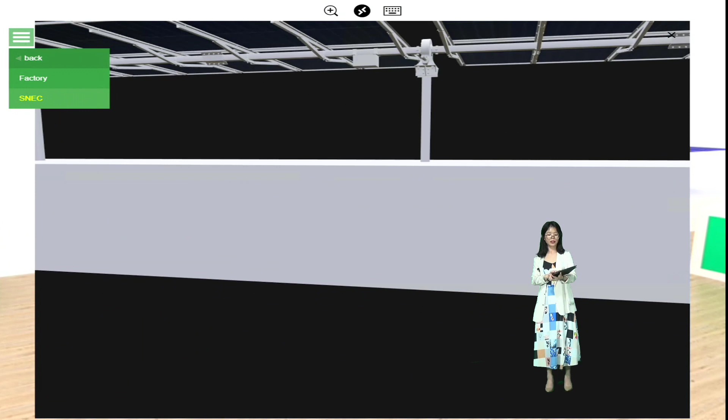Solar tracker, our flat single-axis solar tracking system. The slewing drive, the motor, is put on the post with screws. Very easy installation. And the control box, the control system, is put on the back side of the structure and also the back side of the solar modules, forming the shelter function for the control box, better cooling factor.

And our design can hold both the single row of solar modules and the double row of solar modules. Usually the module is put portrait way. Portrait way means like this. A little bit smaller so that you can see more details. So one table, the maximum solar module quantity that can be held is 90 pieces.

Alright, so to know more about the market information for the solar trackers, floating system, bifacial mounting system, as well as the new situations of our company, Mibet Energy, I would like to have a short presentation with a PowerPoint so that you guys can know more details of our products.

Our company's full name is Xiamen Mibet New Energy. We are headquartered in Xiamen City, southeast China, neighboring the Taiwan Strait. And we focus on the design and manufacture of solar PV mounting systems. Besides the headquarters in Xiamen, we have also founded subsidiaries in Japan and Australia.

Today I will introduce the 3 new products, our company history background, and our project references, totally 5 parts. The first part will be the solar tracking system. From the market research of IHS, the installation capacity for solar trackers in the year 2019 exceeded 31 gigawatts, up to a 55% increase.

And as we can see from 2017 to 2020, the installation capacity keeps going up very quickly for solar trackers, and the main market is in countries like the USA, South American countries, Brazil, Mexico, Chile, Spain, and Australia. As for Mibet Energy, we have mainly supplied our solar trackers to the China domestic market, Southeast Asian countries like Vietnam, Thailand, Malaysia, some European countries like Spain, and also African and Middle East countries like the UAE.

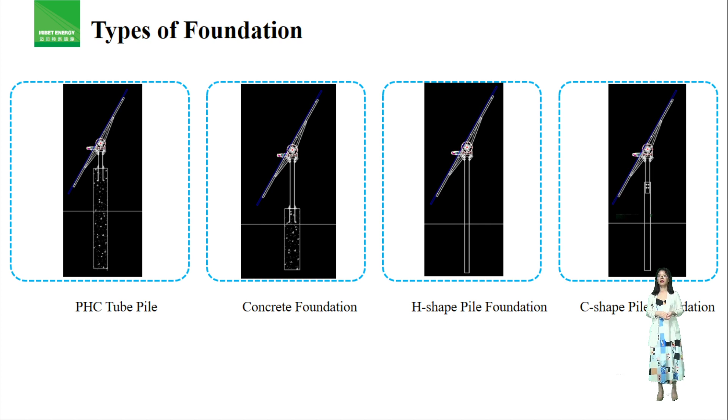So for types of foundations for our solar trackers, we mainly have 4 kinds: the PHC tube pile, the concrete foundation, the H-shaped pile foundation, and the C-shaped pile foundation. This is the model of our horizontal single-axis tracking system, and we mainly have 2 kinds of solar panel layout available, 1+N and 2+N, which means 1 row of solar modules portrait, 2 rows of solar modules portrait.

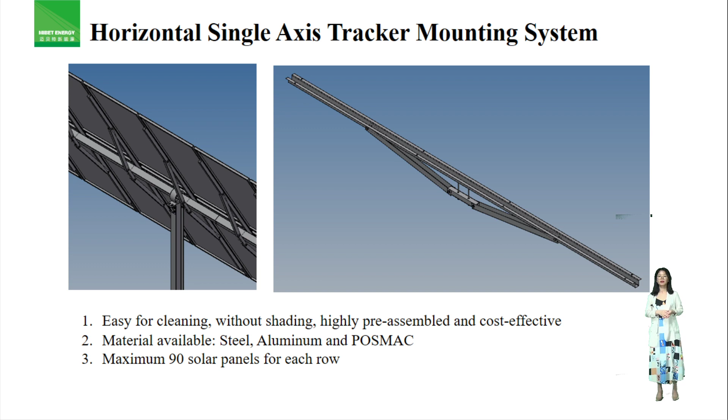The system is applicable for both framed and frameless solar modules, meaning double glass solar panels or traditional solar modules, as well as bifacial solar modules. So the main features of our tracking system: easy cleaning without shading, highly pre-assembled and cost-effective. The material available will be steel, aluminum, or POSMAC. And number 3, maximum 90 solar panels for each row, as I mentioned just now.

Solar panel layout for the horizontal tracker. The tracking angle could be within the range of plus and minus 60 degrees, the string for power supply could be 1500 volts or 1000 volts, and a lithium battery could be used for backup.

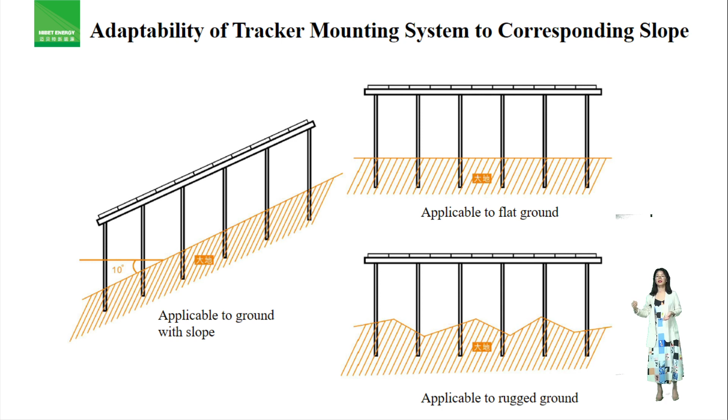So the adaptability of our tracker mounting system: it could be on different kinds of hillside, slope areas of the ground, flat areas of ground, rugged ground, some highly tilted and rugged ground, or slightly rugged ground.

According to some sample system research at our factory in Xiamen, the power generated by the solar trackers could be at least 16% higher than the fixed structure, and we have some software simulation for the comparison. So the rolling bearing is a kind of anti-loosen design. As we know, the trackers keep moving every day in sunny days, so the anti-loosen function is very important.

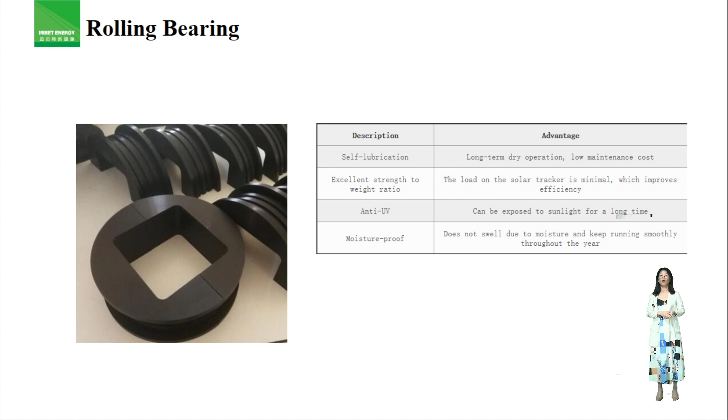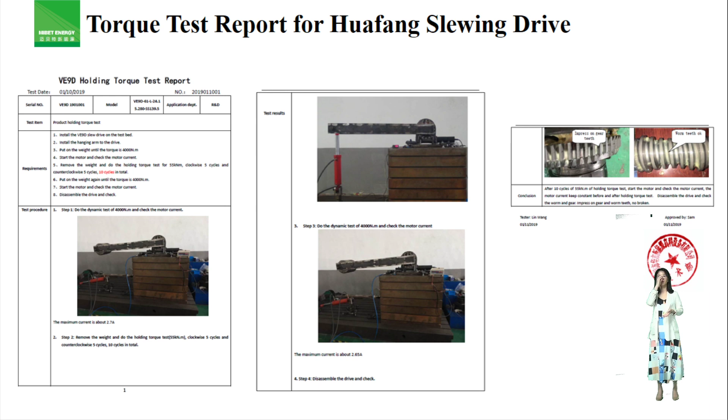So for the drive system, we have different sizes available. We have 3-inch, 5-inch, 7-inch, 12-inch, both vertical and horizontal slewing drives, as well as DC motors. We have different test reports and third-party certificates for our slewing drive; one of the main China domestic brands we use is Huafang. We have the torque test report from a third party.

We have the life cycle test report for the slewing drive. As we know, the drive keeps moving, so life cycle is very important. Usually our motor can last 5 to 8 years in real installation. We also have a waterproof performance test report from a third party, the TÜV report for the slewing drive.

And for the mechanical parameters, the features of our solar trackers: the system type could be a single row, single axis tracking system, and solar panels could be framed, frameless, single side, bifacial. Tracking range plus or minus 60 degrees configurable, and tracking accuracy plus or minus 1 degree. Solar panel quantity for one single row could be 2P30, 2P45, 1P78, 1P90, 1P60, different configurations, and that means 2 rows of solar modules portrait or 1 row of solar modules.

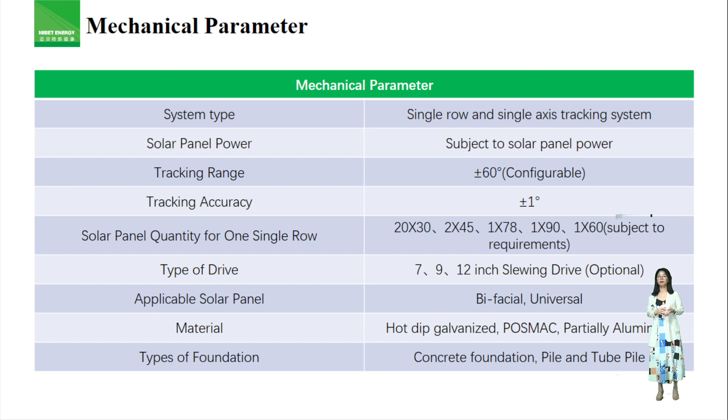Type of drives, we mainly have 3 types: 7, 9, 12-inch slewing drives. And we also have bifacial solar modules compatible with our solar trackers. The material available is mainly 3 kinds: hot dip galvanized steel, POSMAC steel, or aluminum. And types of foundation could be concrete foundation, pile, or tube piles.

So for system design principles, the system uses GPS and Beidou dual positioning system to automatically obtain the local latitude and longitude and the true solar time. By combining with astronomical calculation and the NASA official website solar tracking data verification, it can achieve high precision solar trajectory tracking.

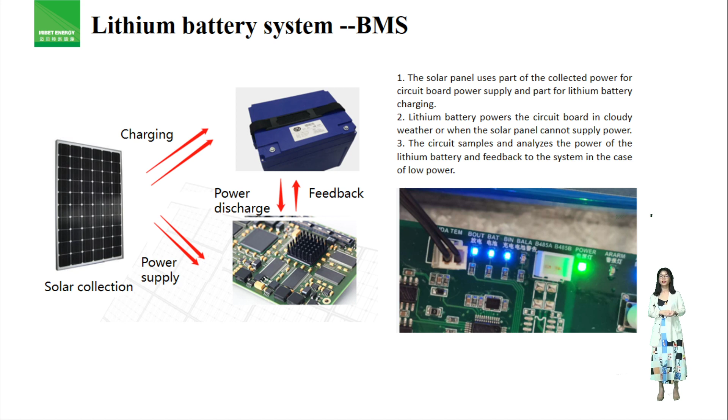So next part. Lithium battery system, the BMS, the power to supply the control system is very important. We have 2 kinds, usually DC power from the solar panels or from the battery. So optional. Next part, the multi-channel power supply system. Power supply for solar or battery power supply chipset. We have 3 options. First option is 24 volt motor power supply. Option 2, 5 volt chip power supply. Number 3 is 3.3 volt chip power supply.

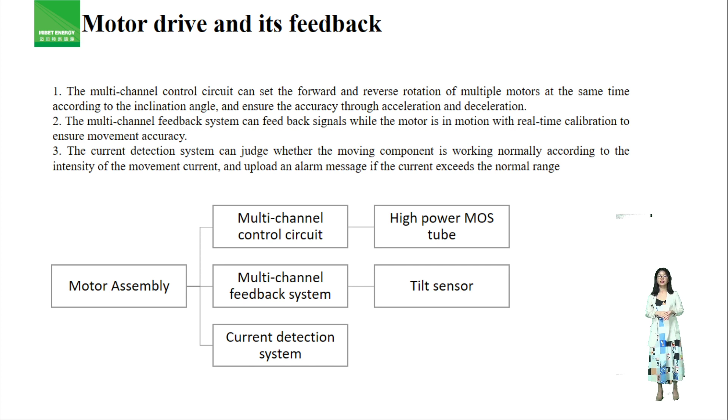Motor drive and its feedback: motor assembly, multi-channel control circuit, high power MOS tube, multi-channel feedback system, tilt sensor, current detection system. So wireless ad hoc network, that means we can supply a wireless communication way for the control system. We also can supply communication with wires. For wireless, we have Zigbee and LoRa as options.

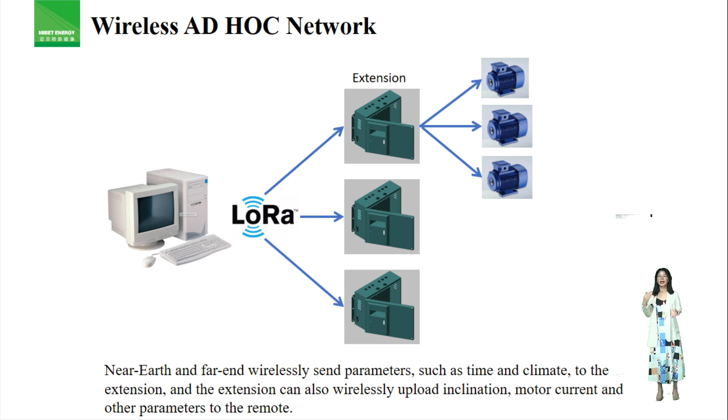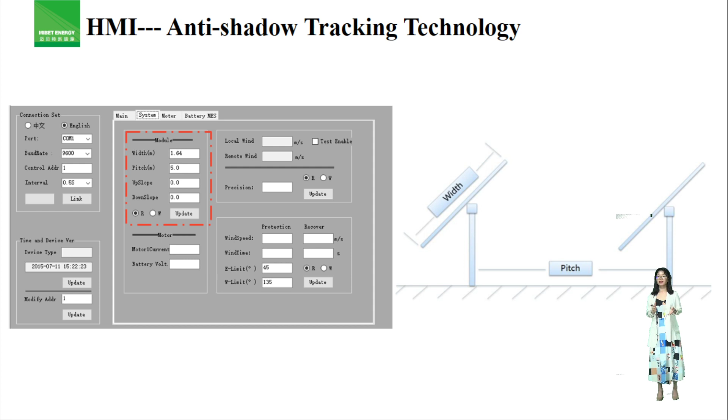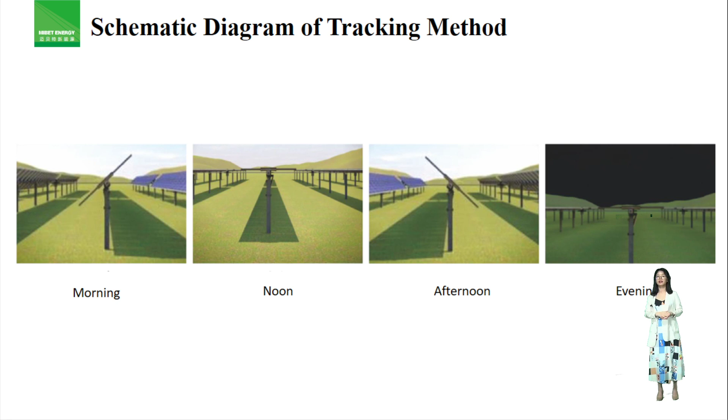So the specification of our control system is around 300 mm length, 210 mm wide, and thickness is around 130 mm. It's a very light and small box which can be fixed on the backside of the structure, on the backside of the solar modules. Control system self-powered. So the schematic diagram of the tracking method: we show four points from the morning, noon, 12 o'clock, afternoon, then to the evening. Evening usually will be 0 degrees.

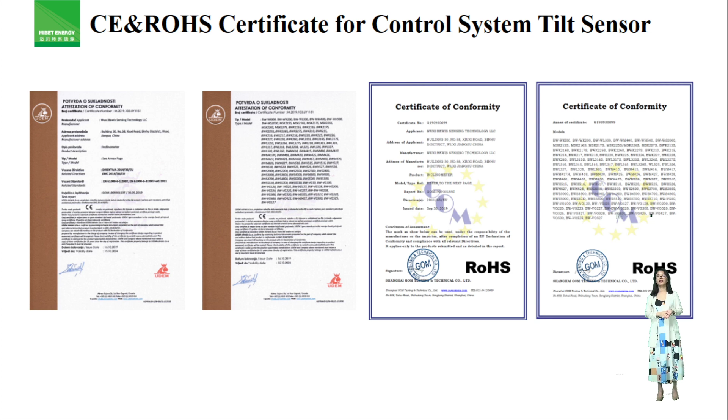Better wind resistance. And for the control system installation guideline, just put the box on the back side of the structure, and then only 2 wires outside to connect to the slewing drive. So for the control system, we have different third-party certificates like CE and RoHS. And we also have the CE certificate for the control system.

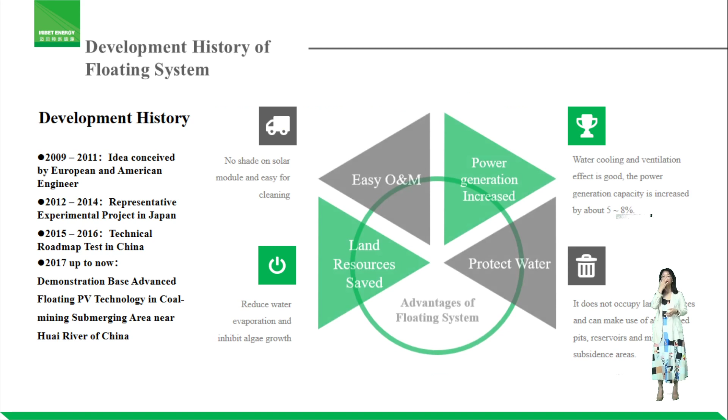As for the development history, as we know, floating solar is a new branch in the solar industry, without as long a history as ground solar projects or rooftop projects. From 2009 to 2011, it was only an idea conceived by European and American engineers. From 2012 to 2014, there were some representative experimental projects in Japan, and from 2015 to 2016, technical

roadmap tests in China. From 2017 up to now, we have some demonstration base advanced floating PV technology in coal mining submerged areas near the Huai River in China, like the biggest floating solar PV project, installed by Three Gorges in 2018. It's in the Huainan area, also close to the Huai River.

As for Mibet Energy, we started research and development for floating systems quite early, from 2015. We are one of the earliest companies to start designing floating systems, and now we rank among the top 3 floating solar system manufacturers globally. The development history, or the technical roadmap, of our floating system.

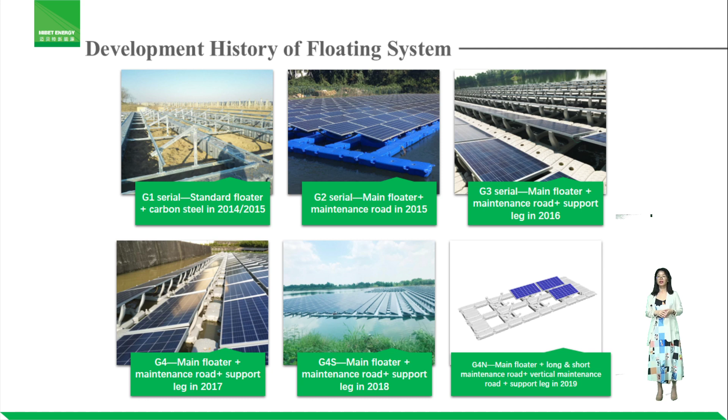After that, we designed G4 and G4S in 2017 and 2018, which combine better container loading with bigger and bigger solar module sizes. Then at the end of 2019, we launched our new generation floating system, named G4N, combining the full solution of the anchoring system, the full solution for string inverters, DC cables, AC cables, and also the fencing around the floating system, and the floater structure for the concentrated big transformer and inverters.

As for the standards followed by our floating system, we have different ISO standards, different GB standards used in China, IEC standards, and also the wind standard GB and wave load JTS. Then we also have BS6349 for the mooring devices calculation. We can also calculate under the Eurocode standard.

Now some comparison to competitors' floater products. As we know, the fixing points between the two clamps are very important to assure the guarantee and prevent micro breakage of the solar cells in the modules. In most competitors' current designs, the clamping distance between two clamps is less than 1 meter, which to some extent is not so safe, because our modules are on top of the water, always floating up and down. Also, the warranty required by most tier 1 solar module manufacturers requires at least 60% of the length of the solar module to be fixed.

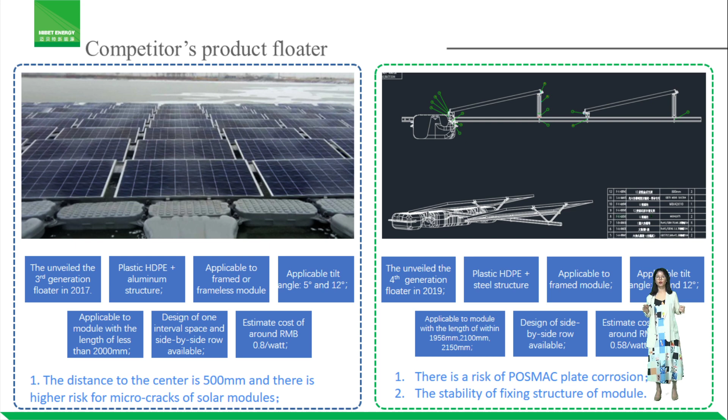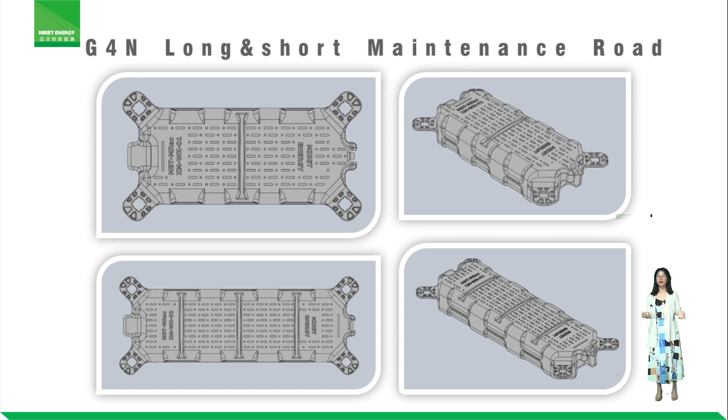So our G4N main floater has added some new strengthening structure inside to make the whole piece stronger compared with our G4S and G4. For our walkway floaters, we divided them into shorter and longer walkway floaters to achieve better configuration of solar modules and compatibility with the bigger and bigger modules available in the market. Currently, we can adopt lengths up to 2.3 meters. During SNEC, we witnessed many tier 1 brands launch 600 watt or higher output modules. The length is usually bigger than 2.25 meters now.

As for the support legs, our G4N design is changed to an arm shape like that to form a better clamping area and clamping distance between the two clamps, compatible with the warranty of the solar modules. As we know, our system should operate at least 20 to 25 years outdoors, so the warranty for solar modules is very important.

This is another portrait, or vertical, maintenance walkway floater we specially designed for the string inverter. An inverter of around 85 to 100 kilograms can be put on this kind of floater. The material is HDPE, the thickness is not less than 3 millimeters, and the buoyancy is more than 150 kilograms per square meter. The anti-slip design on the surface is also quite good. Fixing points for the string inverter, the cable and the fence are added.

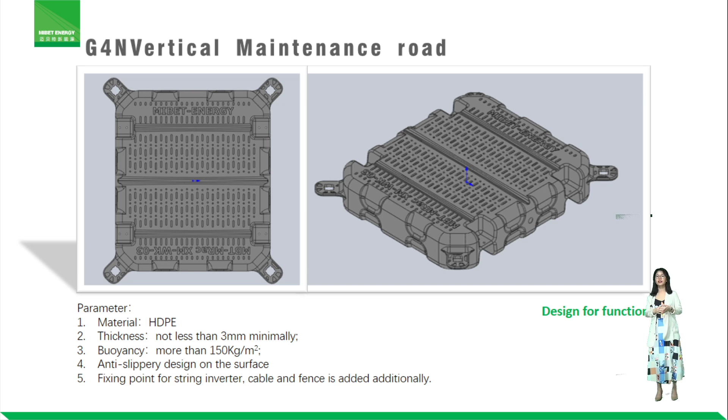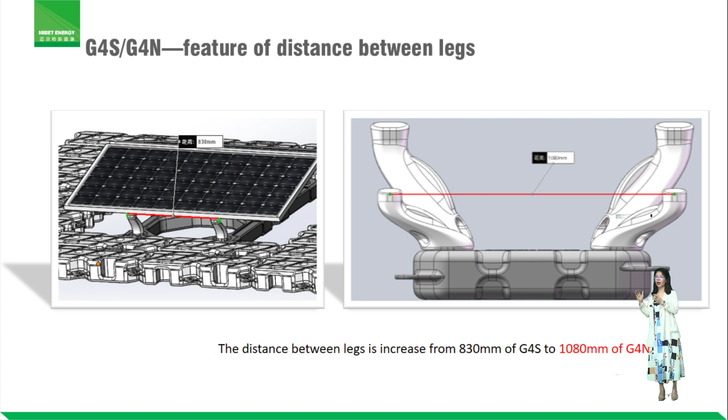The distance between the legs, as I mentioned just now, our G4N design is a kind of arm design, is increased from G4S 830 millimeter to 1080 millimeter, then to 1200 millimeter now. So the clamping point for our floaters is on the top of the side floater, which is not in the middle, also to make the waterproof function better. This is also a special and patented design from Mibet Energy.

And our walkway floaters, except the four connecting ears, we also have the overlapping area between the two floaters to make the whole walkway, whole floater platform connection and strength better.

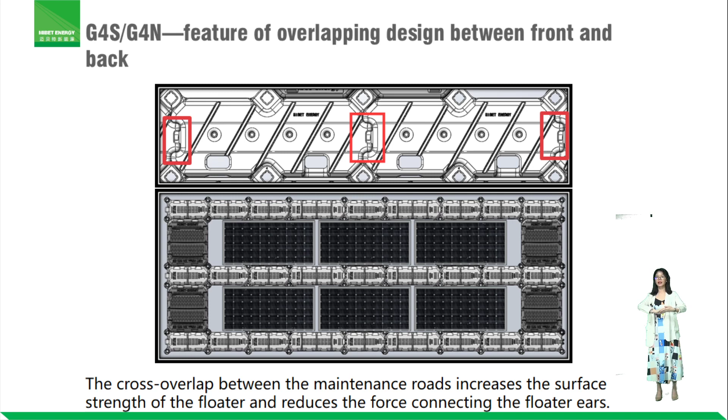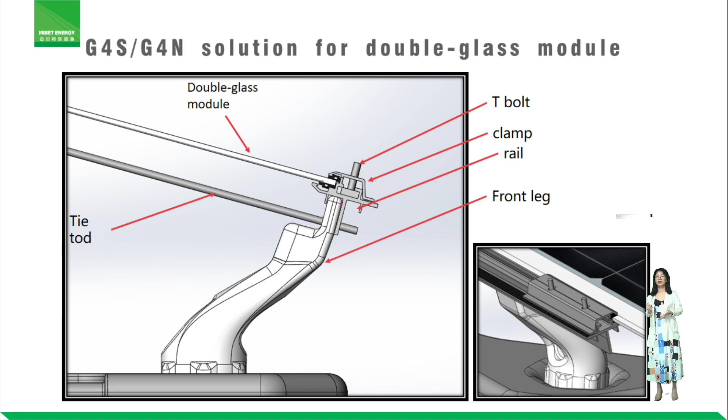So when we install some floating projects on the reservoir, especially for some natural lakes or some treatment water lakes located in rural areas, if we hire some workers to watch the project all 24 hours, the cost will be very high. So we need to have some fencing function to protect the system from some animals, from some not intended step on. So we added the fencing functions for our G4N.

And this is the full layout for our G4N, which means we have walkway floaters for each row of the solar modules. The buoyancy is very good, can withstand 60 meters per second of wind load for this kind of design, and the maintenance for this kind of design is also quite good.

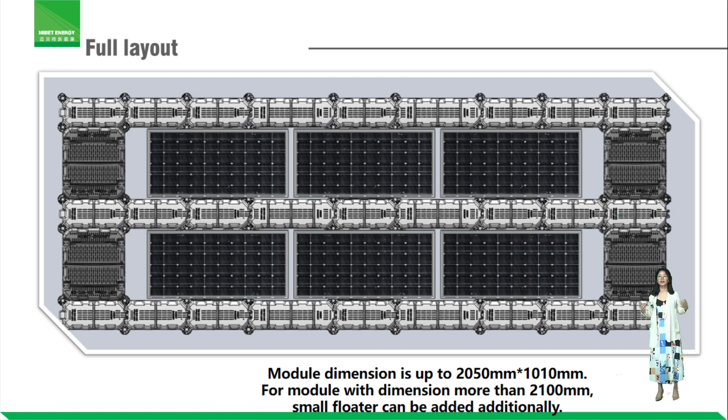So when the wind load is not so strong, and we also need to consider the investment cost, we have another interval layout design. That means we only have walkway floaters for every 2 rows of solar modules. Then when we want to save more cost of our investment, we also have 2 interval space layout.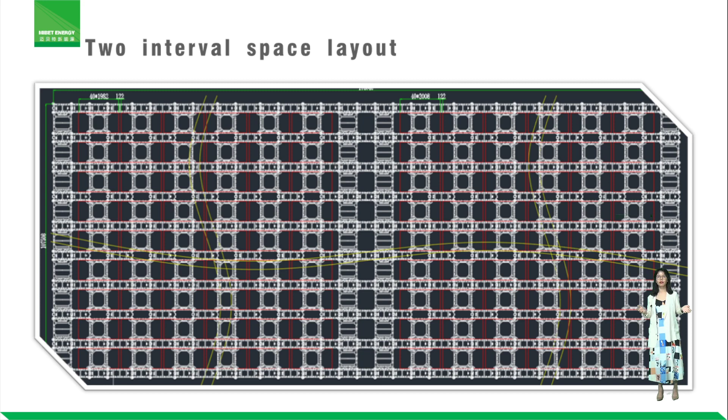We also have the symmetrical design for the tropical areas when the latitude is not so high, with 5 degrees of tilt angle, 5 degree symmetrical design like this. And for our single side layout, usually our design's tilt angle is 10 degree and 15 degree. 5 degree is also available.

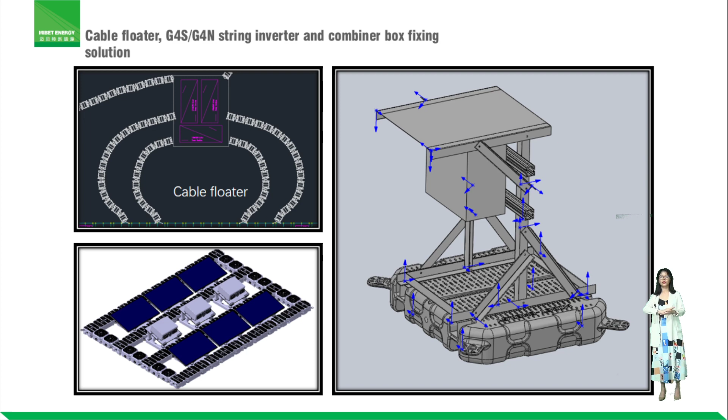So the summary of our solar floating G4M features. Except a small number of fasteners and fixing fixtures, the overall structure of the floating system is all plastic HDPE. In addition to the conventional 5 degrees and 10 degrees, the maximum inclination angle can be 15 degrees.

The center of the side length of the floating system clamping component is more than 1 meter to ensure its stability. And the aisle floating body adopts overlapping design, and adopts the fixing method of the inner frame of the clamping component. After installation, the clearance between the lowest point of the solar module and the water surface is more than 300 millimeters.

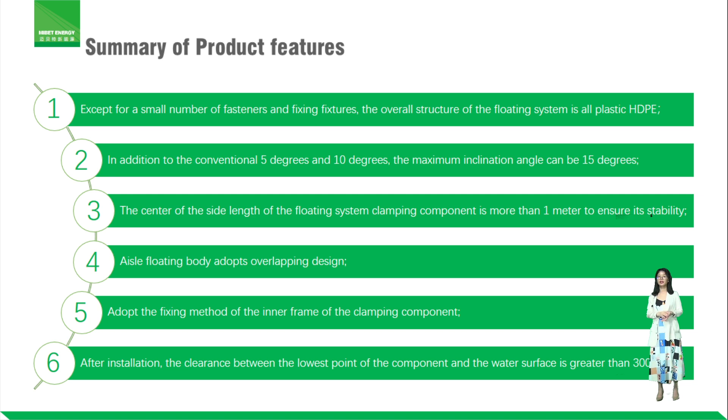So for the quality inspection of our floating system, usually we will check the critical installation dimensions of each floater, and during the production we check to confirm the actual weight, the wall thickness, the inner base thickness of the floater, then randomly check the strength of the parts, at least 5 to 10%. It depends on the floater's quantity. Then before the shipping and packing, we will have a full inspection again.

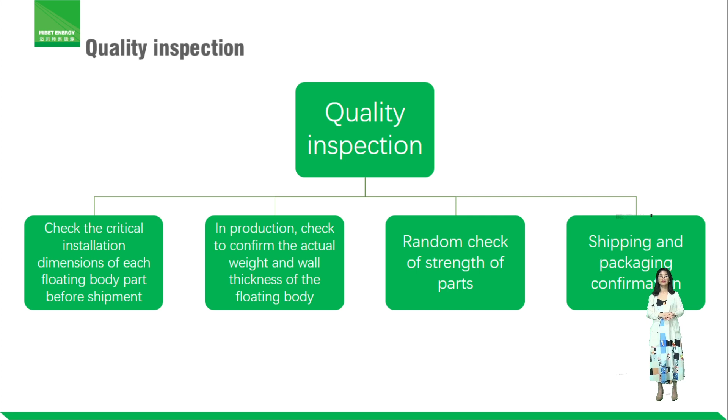As we know, the construction part is not as clear as the ground project or rooftop project, especially for the anchoring system. It's totally different from the ground project and rooftop project. Usually we have two kinds of ways or methods to design and construct the anchoring system.

One is designing the anchoring points into the bottom of the water with different ways: one is with concrete pile directly in, or with a concrete block to put on top of the bottom of the reservoir. The other is anchoring on the shore. It depends on the area of the water and the distance from the floating platform to the shore. So the anchoring concrete block structure, for example.

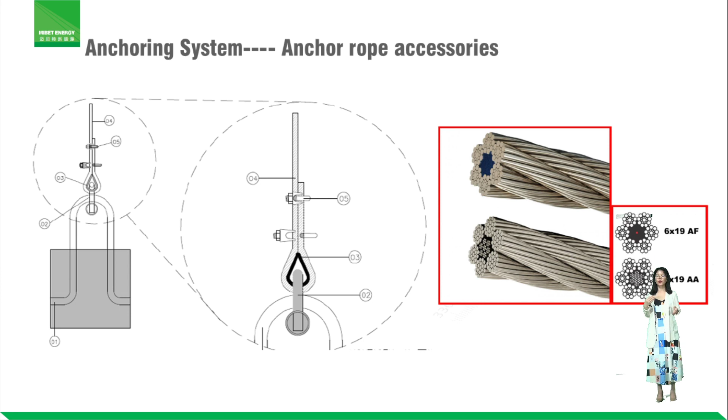The anchoring rope connecting ways - for ropes, we have mainly two kinds of material available: steel rope or a kind of high strengthened plastic. So for the anchoring components, the structure of how to fix with our floaters will be a welded structure with Q345 steel.

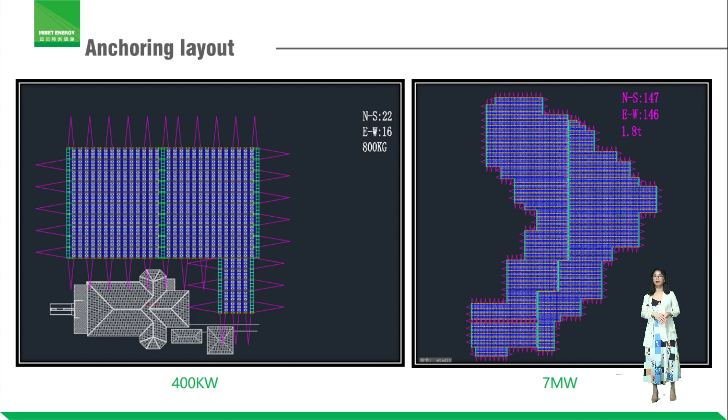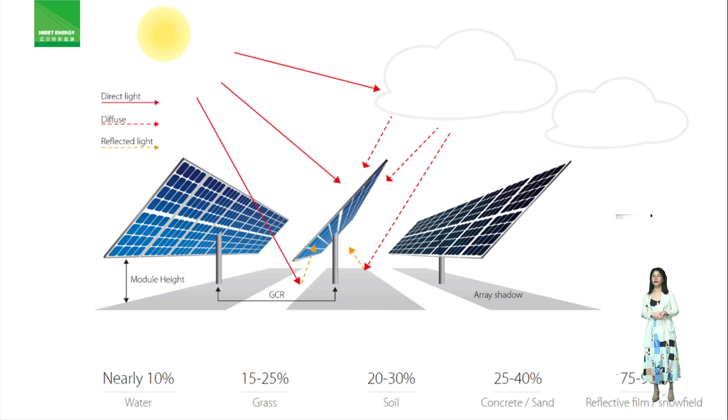This is research from a Tier 1 and top 3 solar modules brand. From different surfaces, the reflection proportion is different. On top of water, nearly 10%. On grass, 15 to 25%. On soil, 20 to 30%. On concrete or sand, 25 to 40%. On film or some snow fields it could reach 75 to 90%.

So module height should be more than 1 meter. For other factors, we will show you more details later. Remember to send emails to contact us, with online messages.

This is another research study for real projects collected in different countries, like USA, China, India, and Saudi Arabia. We can see from different kinds of surfaces the power output increased percentage is different. From normal land, usually ranged from 10% to 20%. From water it's around 5 to 8%.

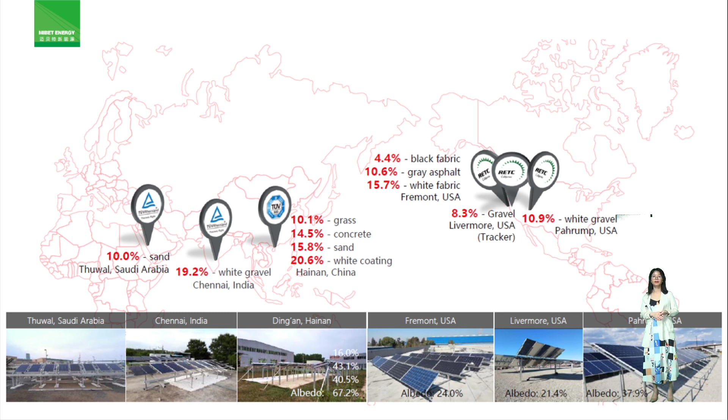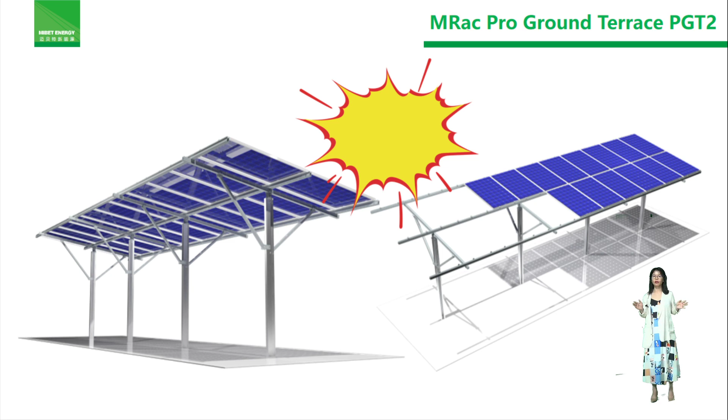So now I would like to introduce our bifacial ground mounting system, PGT2, which is a single pile ramming pile design with a pile rammed directly into the soil. Very easy to install, suitable for large-scale projects. As we know, because shading should be avoided for bifacial solar modules, our main beams - the horizontal beam and the portrait beam - arrangement should be very carefully designed to be exactly compliant according to the width and length of the solar module and the height of ground clearance.

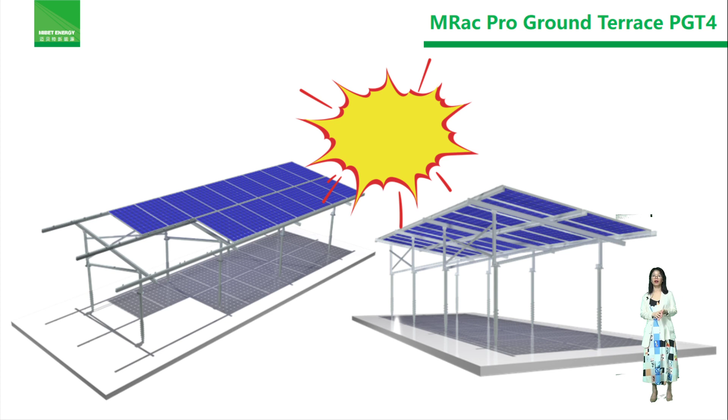So more photos of our PGT4.

So part 4, I will introduce the main background of our company, Mibet Energy. We have supplied more than 8 gigawatts globally till the end of 2019.

Our annual production capacity for the ground and rooftop mounting system is now more than 2 gigawatts, and for floating system this year is around 300 megawatts. For solar trackers, we also have around 1 gigawatt production capacity. We have more than 3,000 project references globally. We are ranking top 10 solar mounting brand, and top 3 for solar floating brand. We have more than 30 certificates from different institutions, more than 60 domestic and international patents for our structural design, and our cargoes have been exported to more than 100 countries and regions.

The main history of our company: Mibet Energy was founded in 2012. In the same year, we created our MRac brand and stepped into the Europe and American market. In 2013, we passed the ISO 9001-2008 certification and built up our first phase factory, and were awarded Top 10 PV Mounting Enterprise. Then in 2014, we passed more international certificates like TUV, CE, MCS, AS/NZS 1170.

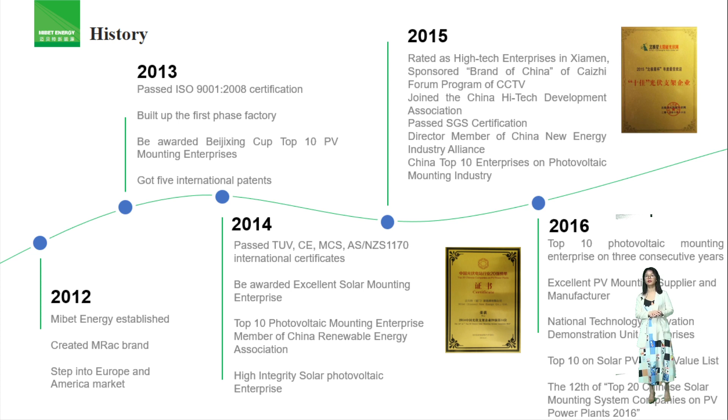So in the year 2017, we are awarded as a Xiamen Sample Enterprise in Production, Operation and Monitoring Chinese medium-sized enterprise. In the year 2018, we are rated as top 10 solar PV mounting system continuously. And in the year 2019, we are awarded as Xiamen Growing Small and Medium-Sized Enterprise. And the Australian branch company subsidiary is founded.

For our further plan in 2020 to 2021, we are targeted to be Australian's top 1 roof mounting brand. Currently, our market share in the Australian market is more than 40%, and the production capacity for floating PV systems will reach 800 megawatts, planning for larger solar ground mounting system projects for tracker systems, floater systems, bifacial mounting systems, and commercial carports.

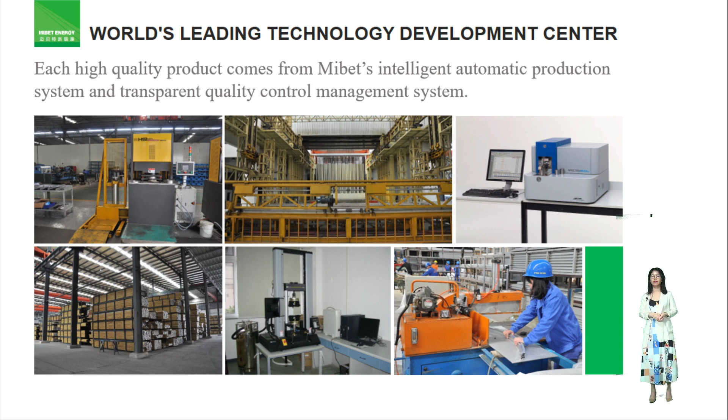So we have our markets in different countries. Top 3 markets: first is our APAC countries like Southeast Asia and Australia. Number 2 is Japan and South Korea. Number 3 is China domestic.

Except these top 3 markets, we also have markets in South American countries like Brazil, Chile, Argentina, Mexico, Uruguay. And we also have markets in North American countries like USA and Canada. We have quite good market share in European countries like Spain, UK, Poland. Then we also have markets in African countries like South Africa, Nigeria, Morocco, Egypt, Kenya. And we also have our markets in Middle East Asia like UAE, Israel, etc.

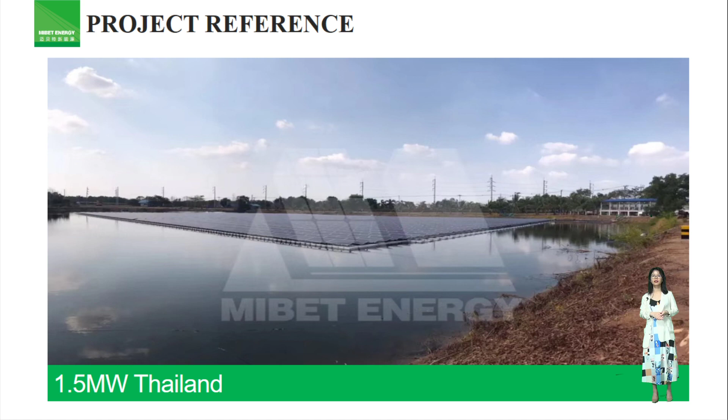So project reference. This is the project reference for the floating system: a 2.5 megawatt in Beijing, 1 megawatt in Shandong, and 1.5 megawatt in Thailand. Several megawatts in Thailand, 1.5 megawatt in Zhejiang province, 10 megawatt combined with 6 sites in Thailand, a 58 megawatt in Middle China, and a 20 megawatt double glass project in China.

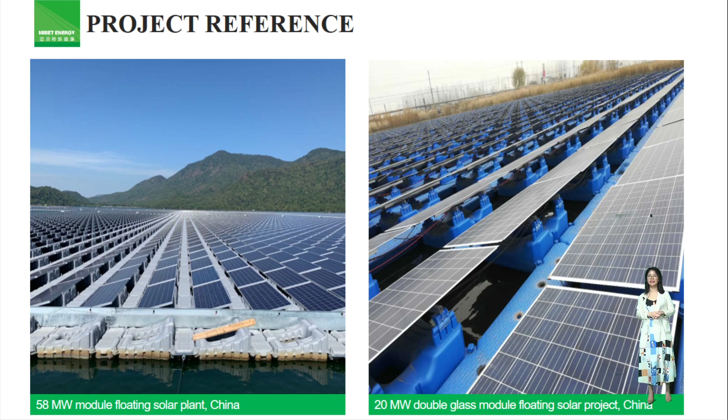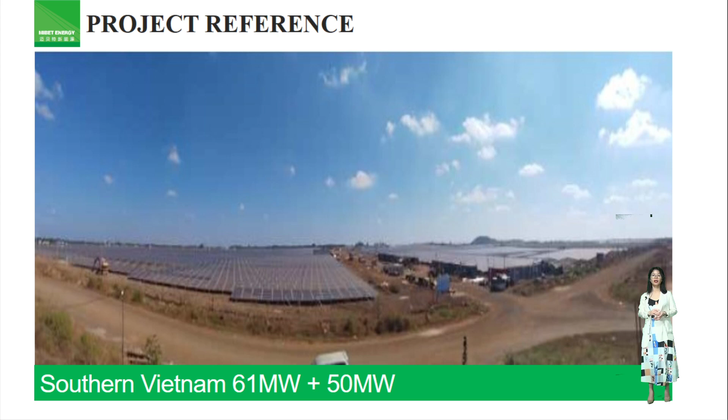So for ground mounting project reference: Cambodia 5 megawatt with steel structure, a 6 megawatt in South Australia, White Island, a 61 megawatt and a 50 megawatt installed in southern Vietnam with the solution of PGT4, and a 51 megawatt in Qinghai province, a 5 megawatt in Uruguay combined with different projects, a 20 megawatt in Hunan province, and a 50 megawatt in Qinghai with concrete foundation.

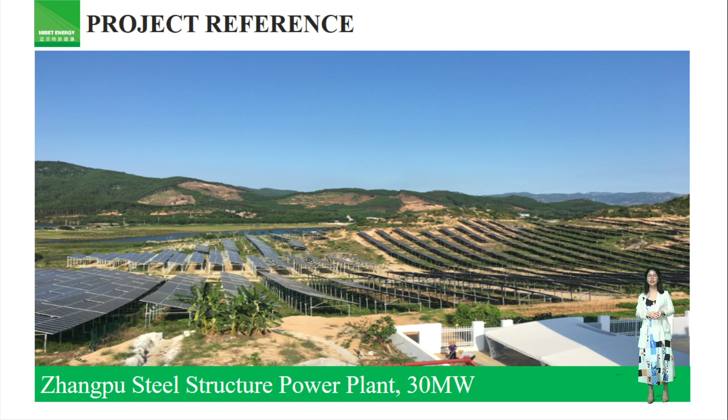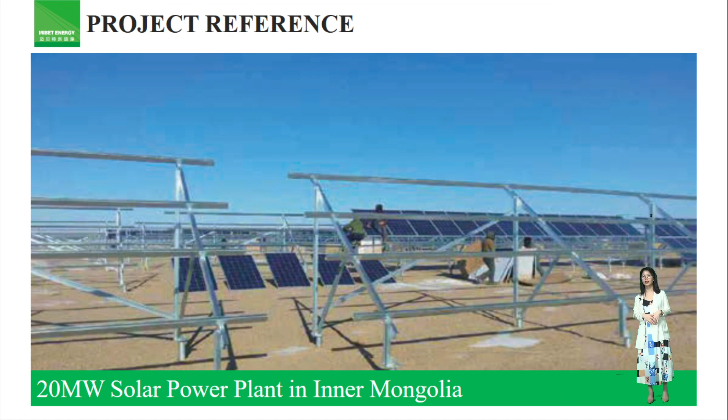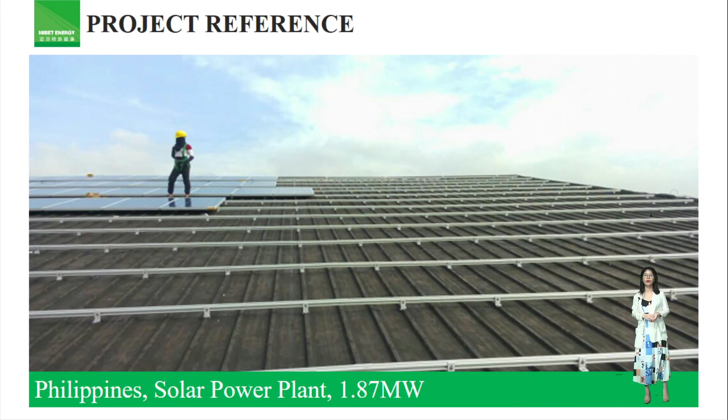Last project reference part is for our rooftop mounting system. It's a 12 megawatt in Hunan, Middle China, Thailand around 4 megawatt, Philippines around 2 megawatt, Vietnam on a shopping mall, on 2 shopping malls of the same brand, 500 kilowatt and 2 megawatt. Central Vietnam factory around 1 megawatt. So Philippines, we have more different projects, 1.6, 5.2 megawatt.

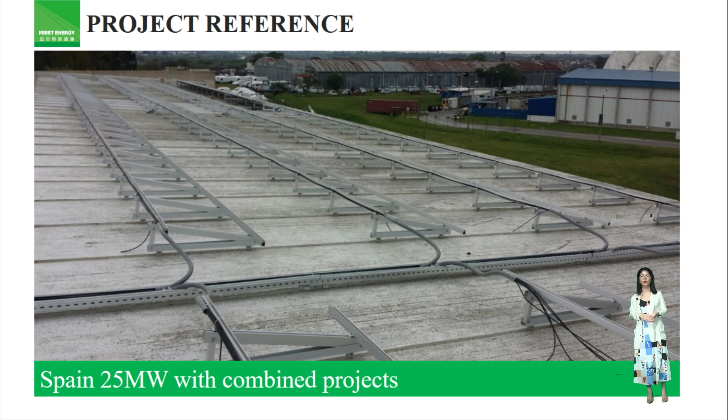Spain, we have combined projects in the year 2019 around 25 megawatt. In Shandong, we installed around 30 megawatt in a factory area. Singapore, we also supplied more than 35 megawatt in the past 3 years. In Dubai, 1.02 megawatt installed on a flat roof. Malaysia and Kuala Lumpur Airport, a 5.63 megawatt clip lock type metal roof mounting system is supplied in the year 2015.

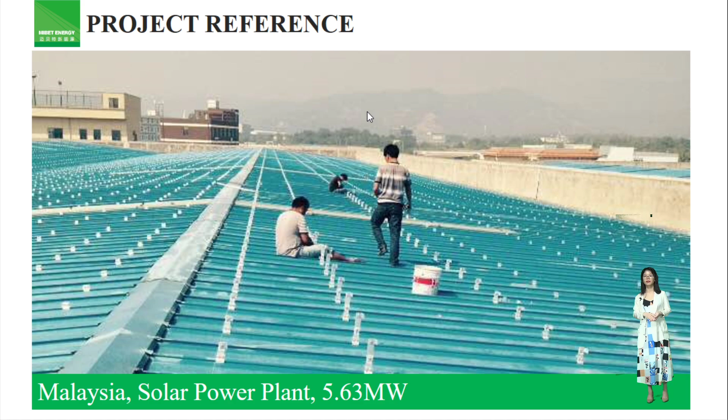Wow, thank you, Michelle. What a sharing. During your sharing, I collected some typical questions from our dear viewers, and I would like to have your answers for that. But before we start the Q&A, I would like to know what you have seen over the past few days, the past 2 days at SNEC.

Okay, this is a great question. As we know, because of the border restrictions this year, we cannot receive the overseas partners and friends at our booth in SNEC in Shanghai.

So most of the visitors these 2 days are our domestic friends and domestic partners, while still we have some international friends who are based in Chinese cities like Shanghai, Beijing, Guangzhou. They visit us, and they are the representatives of some overseas companies.

And except the solid booth in SNEC, we can see many companies launch live shows like Mibet Energy is doing now, and most of the top 10 solar module factories launched very high bifacial solar modules this year, and solar modules for BIPV application. As for solar inverter brands, the top 3 brands all have launched very high-end technology products this year in SNEC.

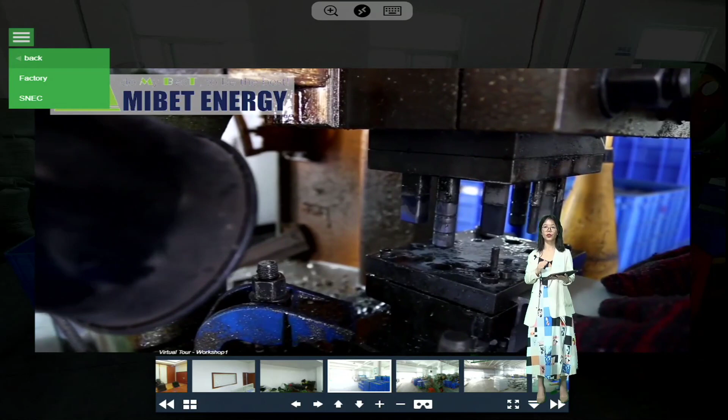So next part, I will bring you to our factory directly. This is our first machining factory. We totally have 3 machining factories. This machining factory, we mainly do the punching, cutting, and the screw lines. I also would like to play the video to show more closely. The cutting machine, the punching machine.

Okay, let's go to next part. Next part, we go to our workshop 2. We have different selections of different molds here to make different components. We have auto punching machines here.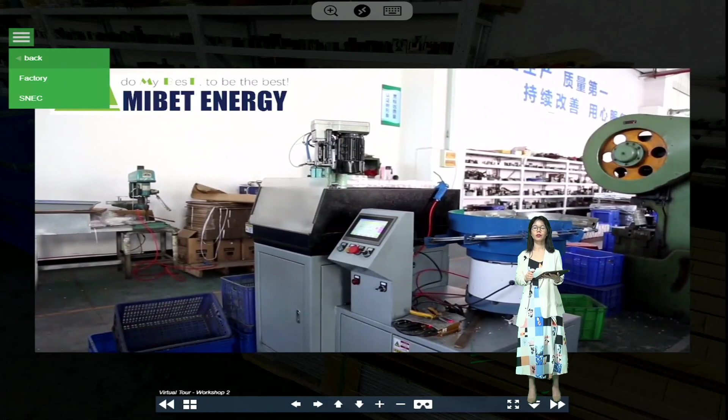I would like to play another video for this machining workshop 2, the cutting machine. We have some covers outside to assure safety. The cutting, different punching machines, and the automatic machine to produce our middle clamps and the tilt-in nuts.

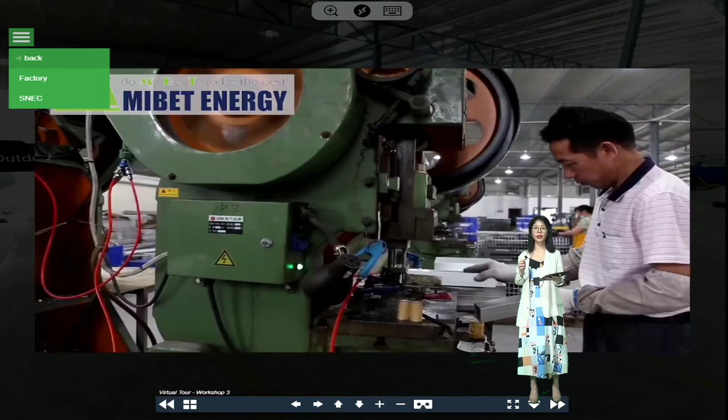So we go to next factory. We have the other machining factory, big one, to produce bigger components. I will play another video. We have more than 20 punching machines in this factory, 5 cutting machines in this factory.

Our orders this year are quite fully planned. Although we cannot see each other face to face this year, still our business is running quite well, and we appreciate a lot the support offered from all our international partners.

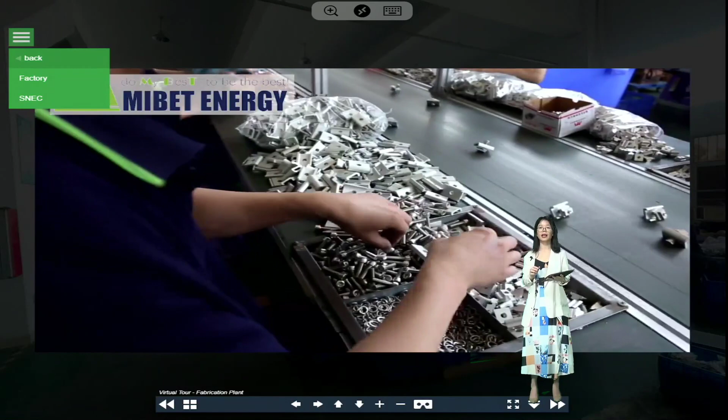So next part, we go to our assembly factory. So assembly factory, we have 4 semi-automatic assembly lines for the small components like end clamp, middle clamp, rail joiners.

So except the semi-automatic assembly lines for the small components, we also have the 2 manual lines to assemble some smaller components. Then we have the pre-assembly lines for big components like ground support beams and posts. So for ground mounting.

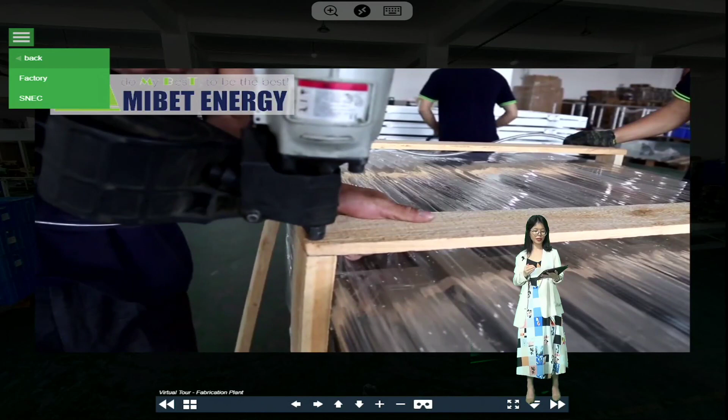Our packaging lines. Usually our small components will be packed in cartons, and big, longer components are put on the pallets. They can be easily loaded and unloaded by standard forklifts.

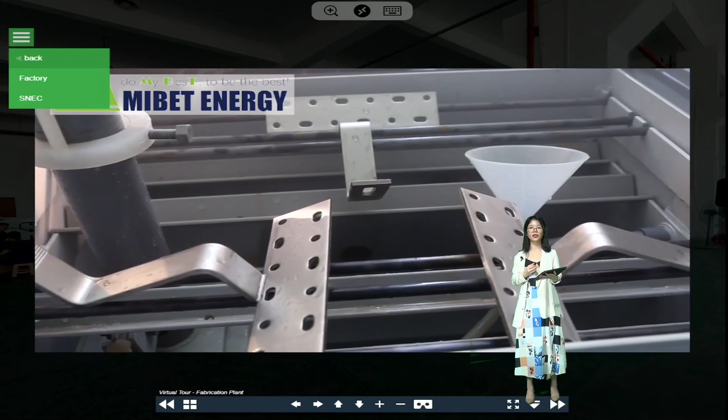As we know, quality assurance is very important for the application of the products and for the warranty. So I would like to show some main steps and procedures of our tests and inspections. The inspection to test the composition of the material, the spray test for the anti-corrosion of the surface treatment.

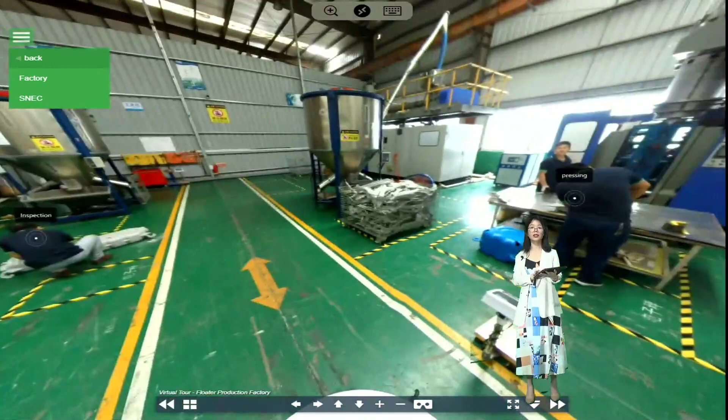So this is our factory for the floaters. I'll show you around. The biggest machine is to produce the main floater. We also have the inspection here to test the thickness of the floaters. So this is the machine to produce the walkway floaters.

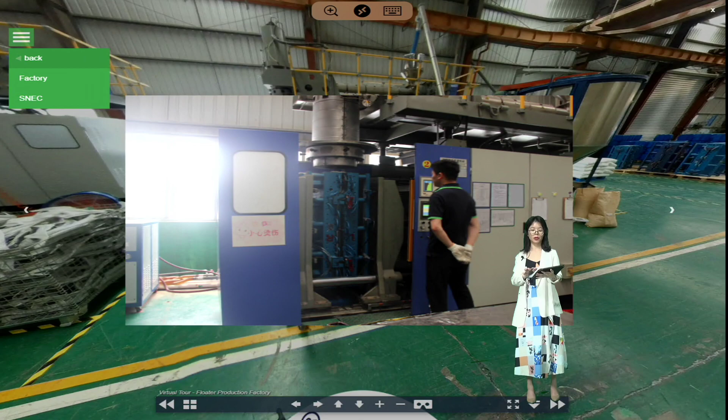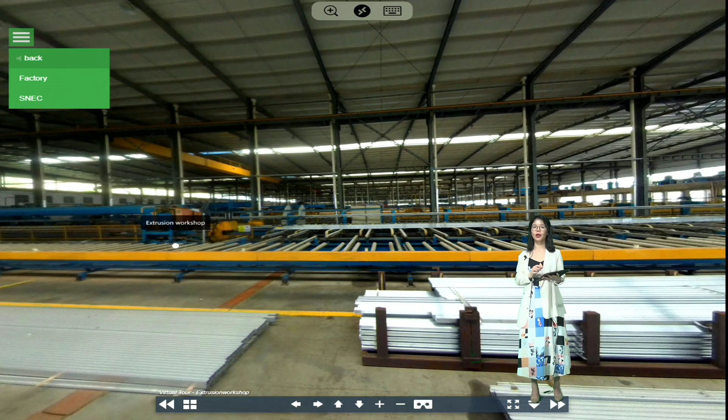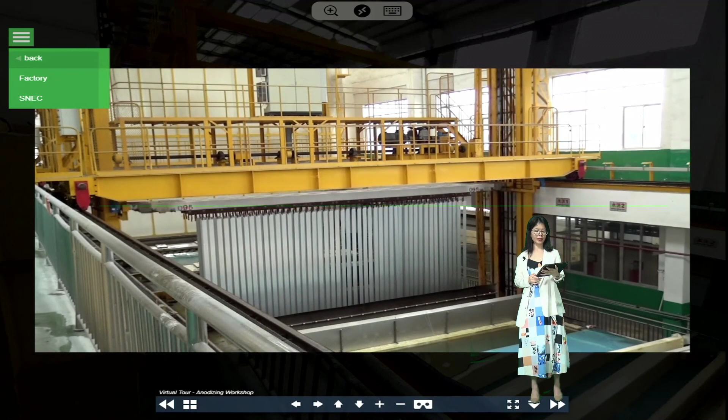We go to next part. It's our raw material aluminum extrusion workshop. The anodizing line. It is a totally automatic line for the treatment of the aluminum. Anodizing thickness usually ranges from 10 micron to 12 micron.

Okay. So for the packaging, usually the rails will be packed 6 pieces or 8 pieces per bundle for easier carrying on site. So the aging. The stock waiting for aging for the aluminum material.

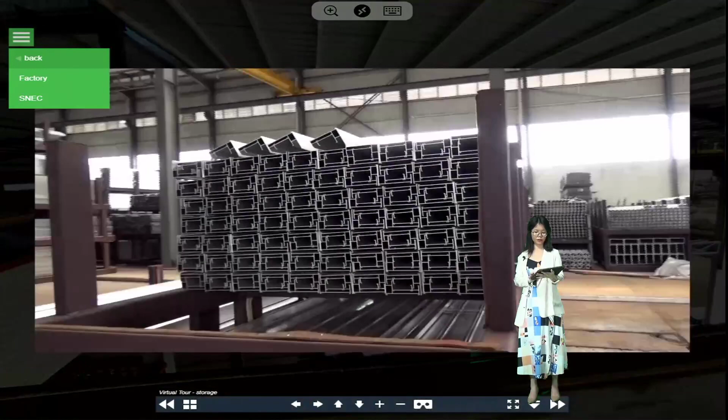Usually the rails and the aluminum will be put on the steel structure to put into some furnace, some equipment, to be aged for 4 to 8 hours to make the hardness of the material better.

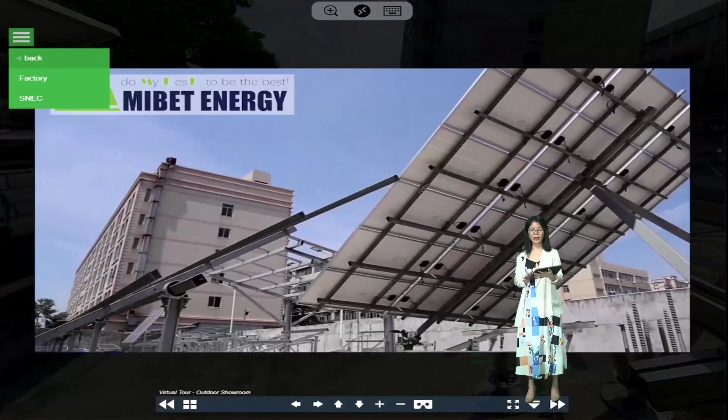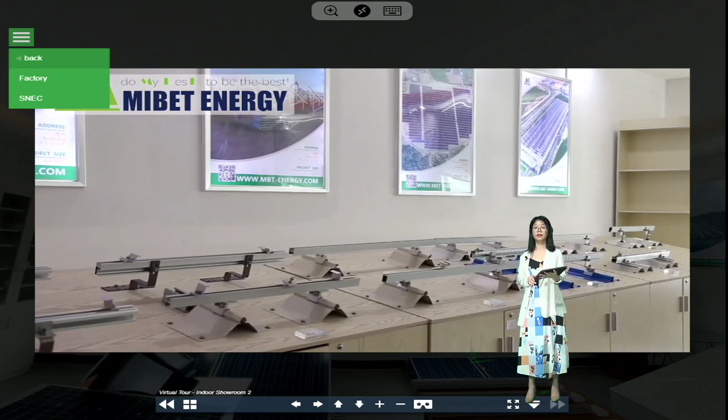So last part is our indoor showroom, which is showing our rooftop samples. Okay. The roof system, for different kinds of roof types: for flat roof, triangle systems, the tile hooks for tile rooftop, the metal clip lock standing seam, and the trapezoidal type for different kinds of metal roofs.

So that's all about my introduction for Mibet Energy, for our newly launched products during SNEC. The 3 new products: solar trackers, the floating system G4N, the bifacial mounting system, and I also briefly brought you to our factory. If you have more questions about our product, our factory, the background, our track records, the project references of our company from any market, remember to contact us.

We have a solid engineering team to support technology questions. We have more than 50 sales staff for sales support.